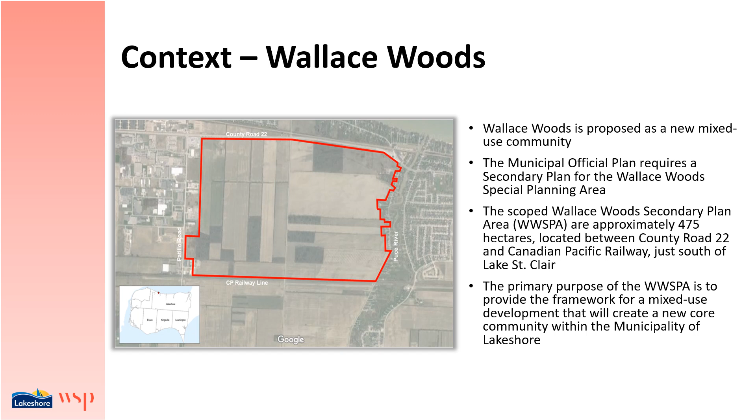There are several provincial, regional, and local planning documents that will influence the nature of development within the Wallace Woods Secondary Plan area and will provide a rationale for a transition from rural to urban development. These policies include the Planning Act and Provincial Policy Statement, the County of Essex Official Plan, and the Municipality of Lakeshore Official Plan. We will be reviewing these policies and their relation to the secondary plan over the next several slides.

The Provincial Policy Statement provides provincial policy direction on matters related to key land use planning issues such as housing, infrastructure, economic development, transportation, and the protection of environmental resources. All land use decisions within Ontario must be consistent with the PPS.

For the secondary plan, relevant elements of the PPS include directing new growth and infrastructure to existing settlement areas, which includes those lands within the Wallace Woods Secondary Plan area, maintaining protection of natural features and adequate access to public open space and parks and community facilities and services, identifying, protecting, and restoring natural heritage systems, and the development of healthy and safe communities by avoiding development and land use patterns which may cause environmental or public health and safety concerns.

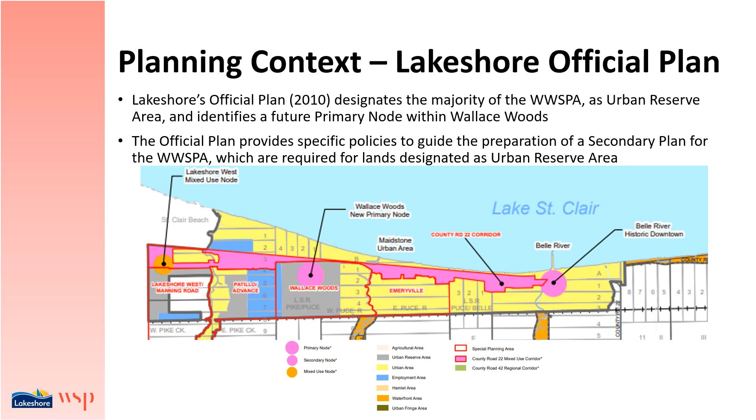The Lakeshore Official Plan designates the majority of the Wallace Woods Secondary Plan area as urban reserve area and identifies a future primary node within Wallace Woods, as illustrated below. The OP provides specific policies to guide the preparation of a secondary plan for the Wallace Woods Secondary Plan area, which are required for lands designated as urban reserve area.

As part of the secondary plan process, several studies were prepared to understand current conditions and identify needs for the secondary plan area. The studies included servicing, transportation, natural environment, noise and vibration, archaeology, and land use and urban design. The next few slides will provide an overview of key recommendations from each study.

The servicing study had several recommendations, including identifying that a total of 9 stormwater management facilities will be required for runoff quantity, quality, and erosion controls. Wherever possible, storm runoff will discharge to nearest protected areas and wetlands through a bioswale in order to help clean the water. Suitable low-impact development measures are required before discharging to watercourses. An erosion and sediment control plan will be required to minimize sediment leaving the site during the construction stage.

The realignment and improvement of the Wallace Line drain. Identifying that servicing exists at the east end of the study area. And confirmation of servicing capacity and design is to be addressed as each phase is brought online.

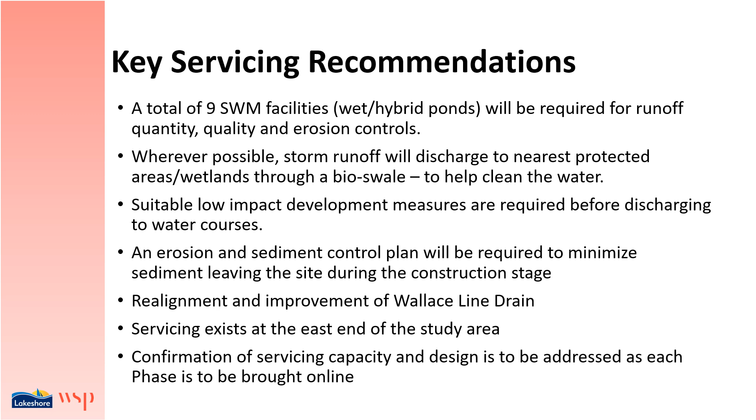The transportation study forecasted that the signalized intersections in the secondary plan area would operate above capacity thresholds from 2026 to 2041. Mitigation measures for this include a possible right-of-way widening by providing additional through lanes to increase road capacity, especially on Essex County Road 22 and 42, the provision of a dedicated left turn and/or right turn lane to increase storage capacity for turning vehicles, and overall traffic signal timing plan adjustments to accommodate traffic, especially during weekday AM and PM peak hours. The study also suggested that traffic control signals may be considered to manage traffic along minor roads, including turning lanes when feasible.

The Natural Heritage Study identified several studies required for the completion of subsequent environmental impact assessments in Wallace Woods. These studies include ecological land classification, breeding bird surveys, breeding amphibian survey, reptile surveys, 3-season floral inventory, fish habitat survey, and early spring turtle basking survey.

Further, the Natural Heritage Study also recommended exploring opportunities to include existing hedgerows and proposed trails, paths, parks, and other naturalized features to improve connectivity within the natural heritage system.

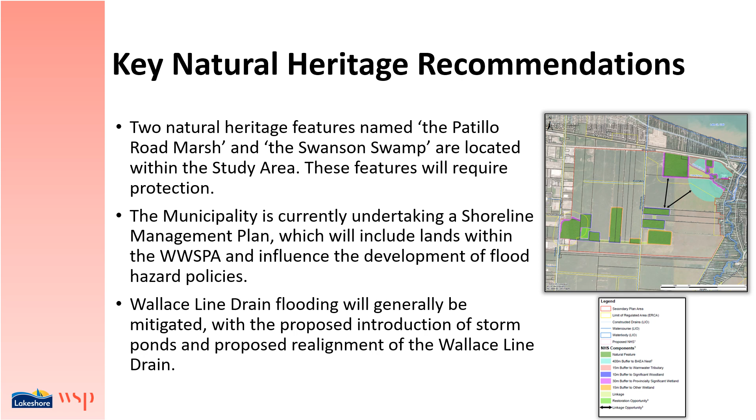The noise and vibrations report recommendations included upgraded exterior wall and window construction for dwellings in close proximity to rail lines, sound barriers for dwellings in close proximity to the rail lines, and vibration mitigation measures also needed for areas near the railways. The report also identified that mitigation measures are anticipated due to noise from the industrial facilities located to the west of the subject site.

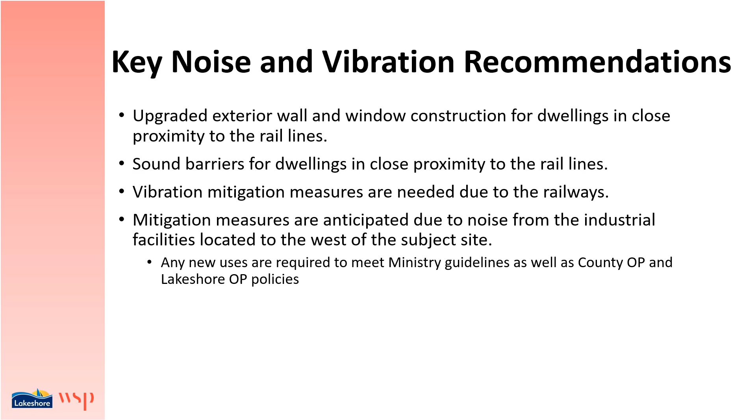It is important to note that any new uses are required to meet ministry guidelines as well as county OP and Lakeshore OP policies.

The Land Use and Urban Design report included recommendations for the look and feel of the secondary plan area. This includes establishing higher densities in proximity to the primary node, with transitions to lower densities as distance increases to over a 10-minute walk. Using Greenlinks to provide green transitions between neighborhoods and land use types, as well as enhancing the ability of residents to move through the community without a vehicle.

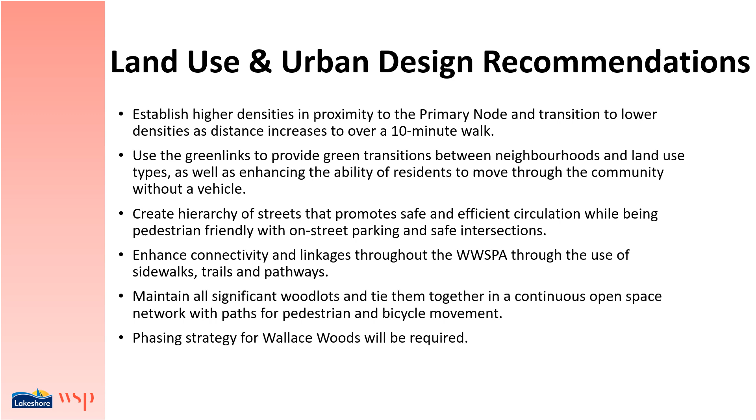Creating a hierarchy of streets that promotes safe and efficient circulation while being pedestrian friendly with on-street parking and safe intersections. Enhancing connectivity and linkages throughout the Wallace Woods Secondary Plan area through the use of sidewalks, trails, and pathways, maintaining all significant woodlots and tying them together in a continuous open space network with paths for pedestrian and bicycle movement, and requiring a phasing strategy for the development of Wallace Woods.

The majority of the plan area is proposed for residential, with mixed use, employment, and natural heritage uses included as well. The plan area is traversed by major collector roads where mixed use density is prioritized. The area is linked by minor collector roads and multi-use trails which connect the natural heritage system and the parks located throughout the area.

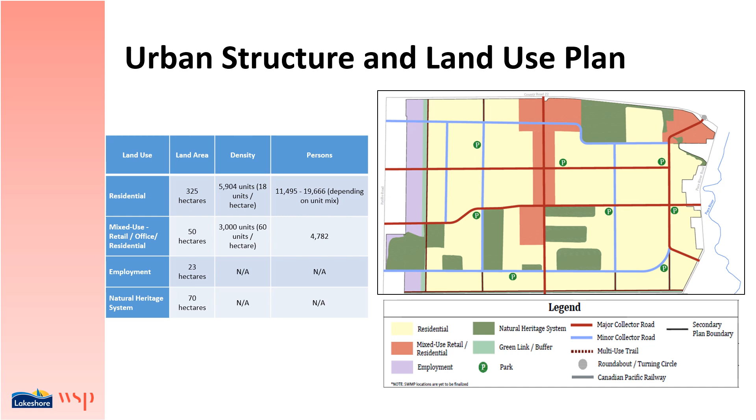The Wallace Woods primary node is one of two primary nodes identified within the Municipality of Lakeshore official plan. Primary nodes must include a range of medium to higher density residential uses with a minimum density of 60 units per hectare. Commercial uses in the primary node will be concentrated at the County Road 22 and Wallace Line Road intersection. Throughout the primary node, densities and development patterns that support public transit opportunities will be encouraged.

In addition to this, the primary node will also include appropriate transitions with adjacent land uses to avoid land use conflicts, and the creation of a linked network of pedestrian pathways and public open spaces.

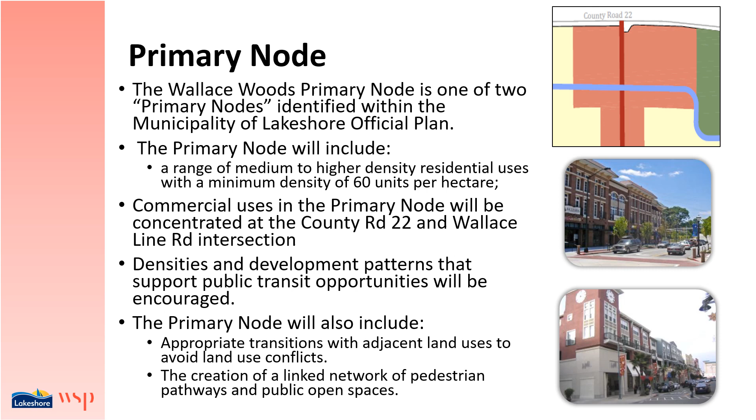Within Wallace Woods, there will be a variety of housing forms to meet the needs of the community. This includes single detached and semi-detached, street townhouse dwellings, stacked townhouse dwellings and apartments, as well as senior and special needs housing. The residential areas will be developed to ensure density, height, and character of development is compatible with adjacent land uses.

These areas will provide adequate design, landscaping, and buffering measures to ensure that the visual impact of the development on adjacent uses is minimized.

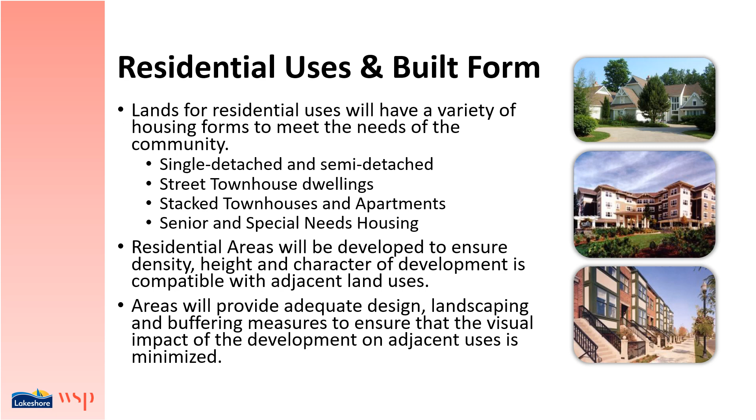The employment area consists of lands that are characterized by their high visual profile and accessibility and are generally comprised of employment and industrial, accessory commercial, and related uses.

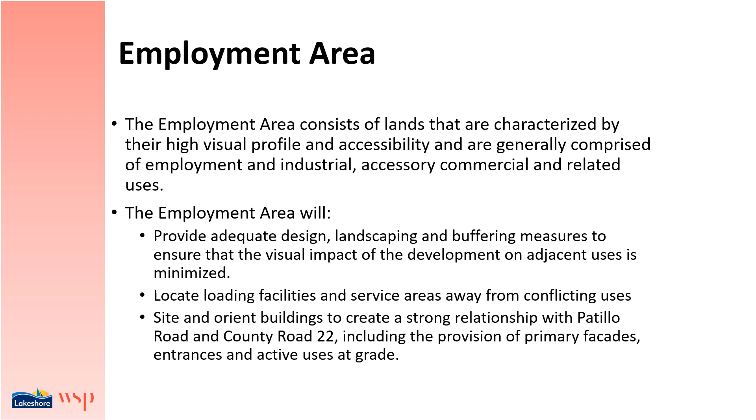Within Wallace Woods, the employment area will provide adequate design, landscaping, and buffering measures to ensure that the visual impact of the development on adjacent uses is minimized. Locate loading facilities and service areas away from conflicting uses. And site and orient buildings to create a strong relationship with Patillo Road and County Road 22, including the provision of primary facades, entrances, and active uses at grade.

The community services and facilities in Wallace Woods will be designed to meet the needs of the community. The services and facilities will provide adequate off-street parking and loading facilities, ensure development is designed to be accessible to all persons within the community, including the elderly and those persons with physical disabilities, and be appropriately distributed.

The Municipal Parks and Recreation Master Plan identifies Wallace Woods as requiring a park classified as community park. This will be included within the area. Early development of parkland, open space, and community trails is encouraged as set in the Municipality of Lakeshore Community Services Master Plan.

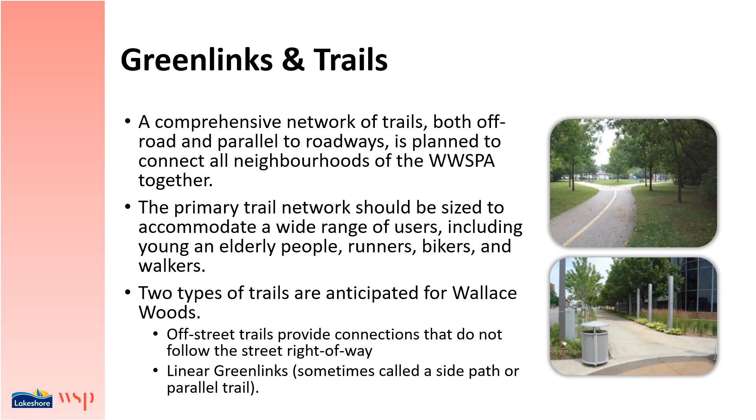As previously mentioned, a comprehensive network of trails, both off-road and parallel to roadways, is planned to connect all neighborhoods of the Wallace Woods area together. The primary trail network will be designed to accommodate a wide range of users, including young and elderly people, runners, bikers, and walkers. There are two types of trails anticipated to be included in Wallace Woods: off-street trails, which provide connections that do not follow the street right-of-way, and linear green links.

The Wallace Woods Secondary Plan is proposed to be implemented over 5 phases, beginning with employment in the northwest section, a portion of the primary node, and the northeast residential area. The development of public facilities, including parks, will be coordinated across phases as appropriate to meet the needs anticipated as part of future development.

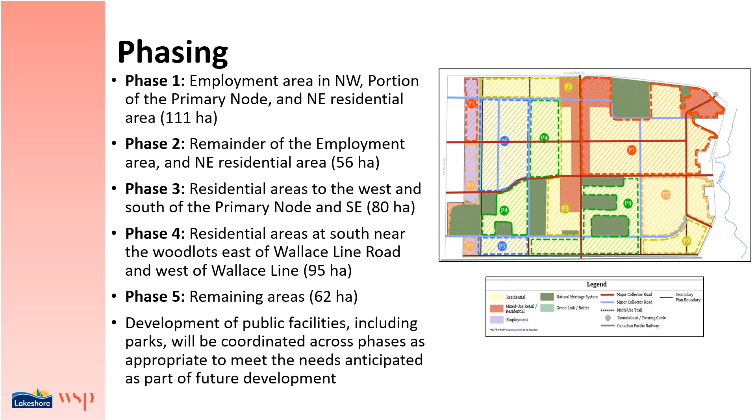This slide concludes the presentation.

In terms of next steps, we will first consider feedback and incorporate it into the revised secondary plan. Once input has been considered, we will prepare the official plan amendment to implement the secondary plan and hold another open house and statutory public meeting to collect further feedback. The final secondary plan is intended to be considered for adoption by Council in July 2022.